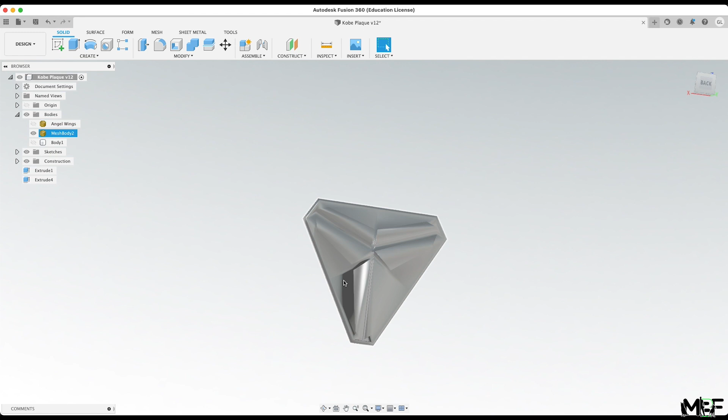Mamba out. So, my very own design, but not really, because I'm going to be stealing some other designs off of some online sites to make this happen. So, let's get started with the obligatory, tried and tested Black Mamba logo. This was an easy model to find with a really high level of detail, as you can see in some of the smooth indentations and transition points in this model.

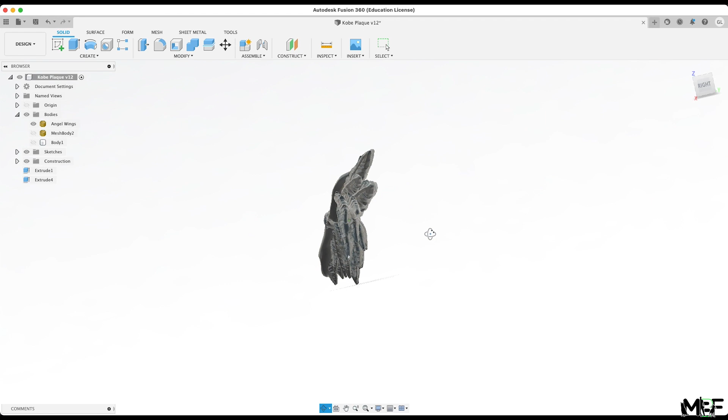Next, let's add some wings. Not as easy to find. I had to suffice with this model here, which wasn't the exact style of wings I was looking for, but the detail was high enough for me to carve out with the CNC. You'll see later that this is also the cause of the most trouble for me. I wasn't sure how I wanted to combine the two of these yet, but I thought it would be cool to have the wings coming out of the logo, and so we'll go with that for now.

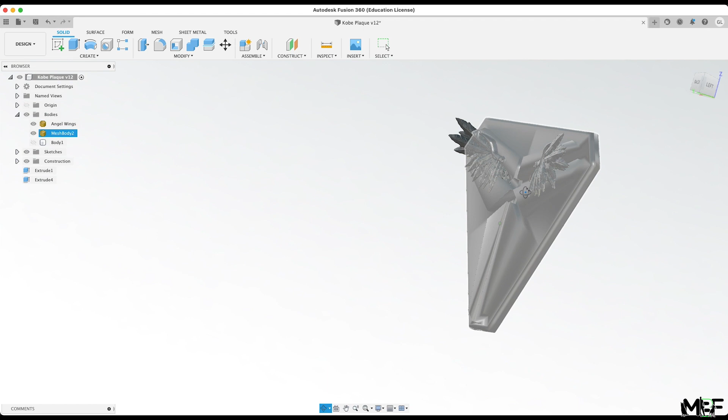The important thing to keep track of here is the depth, because there's only a certain stock thickness of wood that I'll have to work with, and I don't want to go overboard with the layers here. And now, the easiest layer, adding an NBA jersey to the top layer by extruding out an SVG file of a generic jersey design.

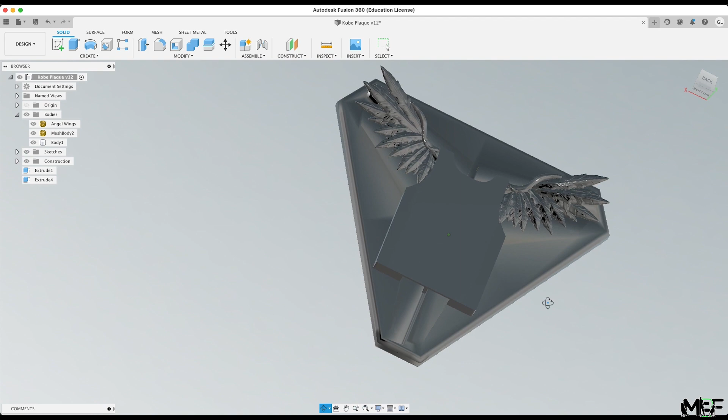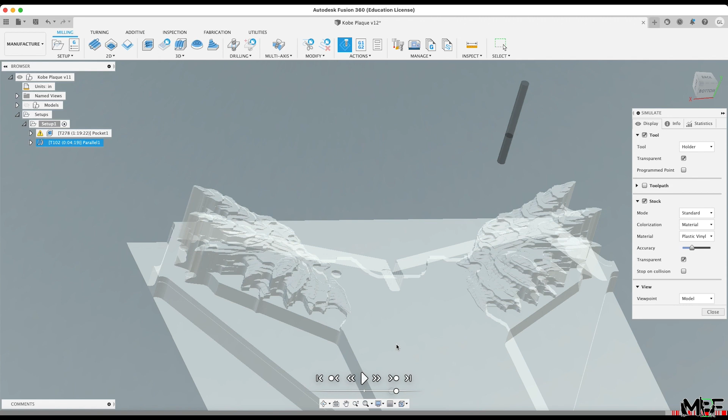Okay, now let's tell my machine how I want all of this cut out. I'm going to keep it simple, a pocket operation that lets me clear out a massive amount of the wood to get started with a 1/4 inch bit, followed by a parallel operation with a tighter diameter to get as much detail as possible in this design. The smaller the bit, the better this will come out. And again, we'll touch on this later. Okay, let's export this out and take it to the Shapeoko CNC machine.

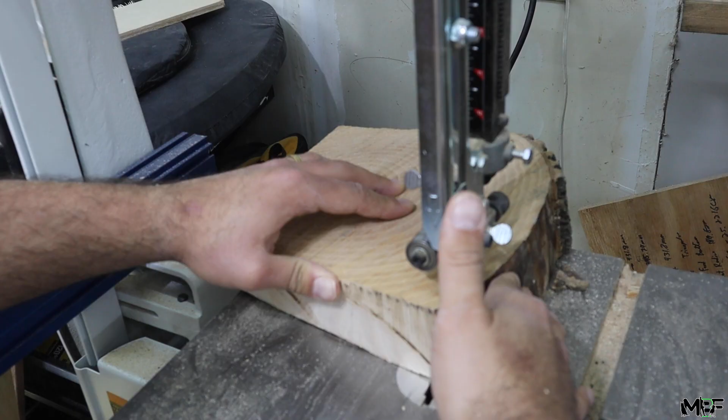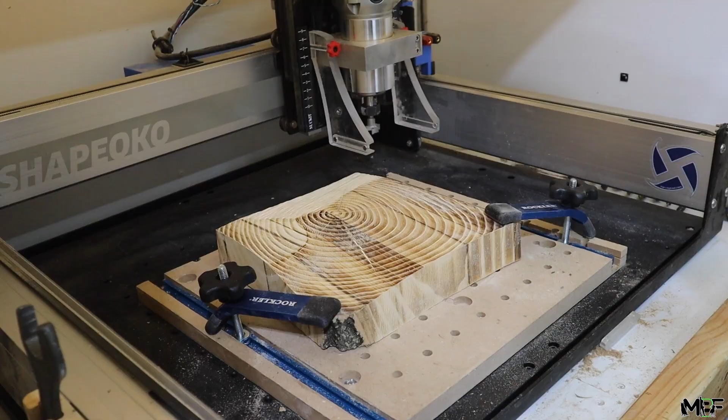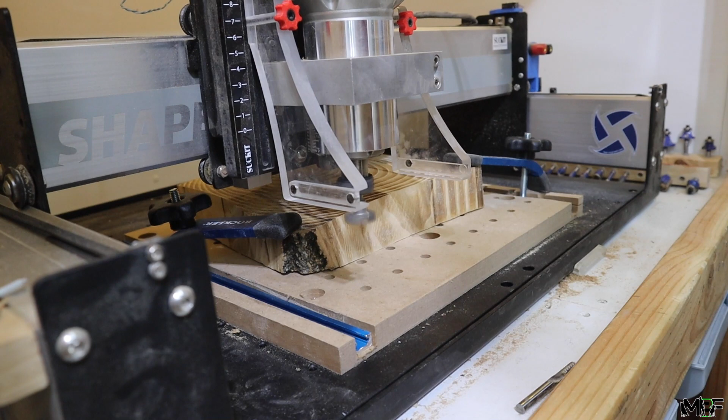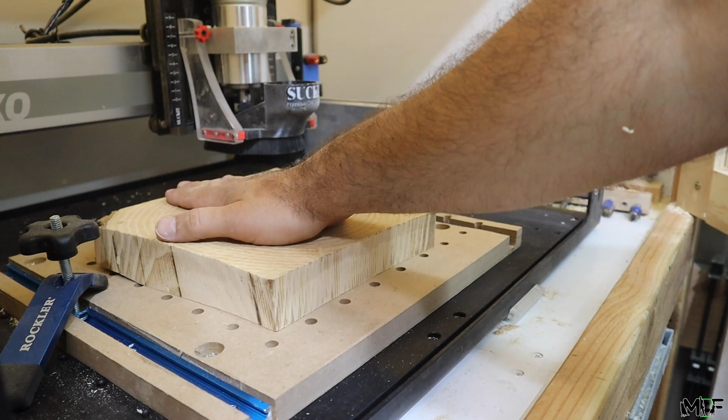I also flattened it a bit on the bandsaw, but I'm going to flatten it properly when we get to the CNC. We're going for 1.5 inches of depth here, so I'm going to be using a wider carbide bit for flattening on top. Then we're going to use this flat side as the bottom, that way we make sure we're even when cutting down from the model. Some double-sided tape, a nice pat on the top, and some clamps on the edges, and this thing won't be moving anywhere.

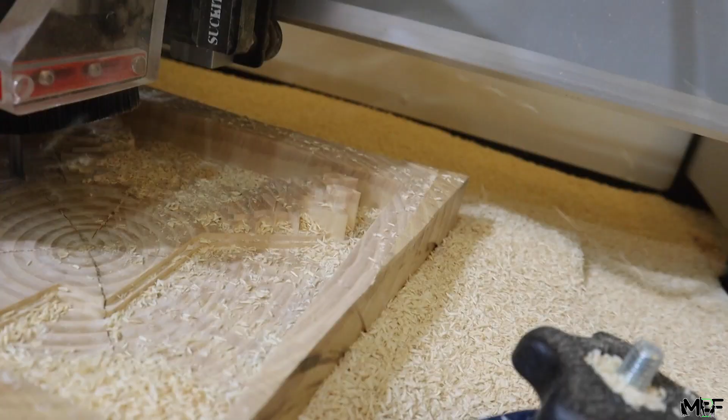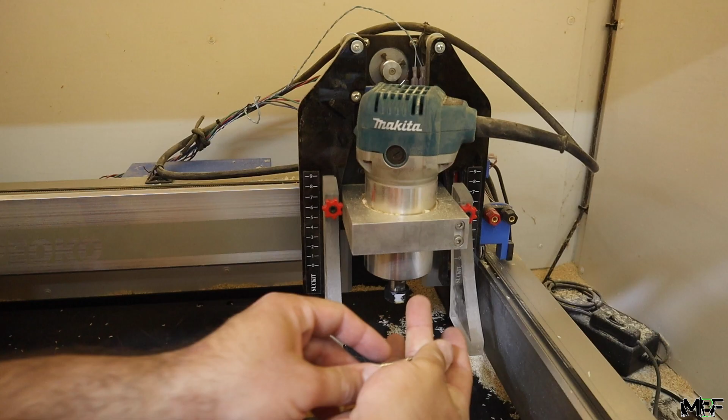Now, let's switch from the flattening bit to my 1/4 inch bit, and there's my elbow. Sorry about that. Now we're seeing that operation where we're taking out a big chunk of the wood at a time with a 1/4 inch bit. And remember that part I said about the smallest bits being able to give the best detail? Well, don't let those be from China, or else you're going to notice the same thing I did at this moment: the bit doesn't fit inside the CNC collet.

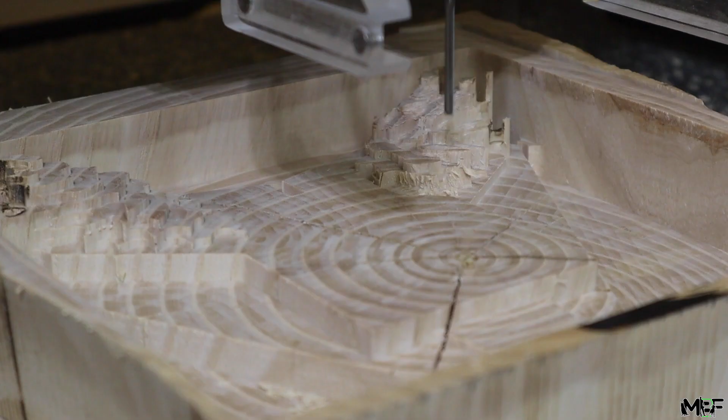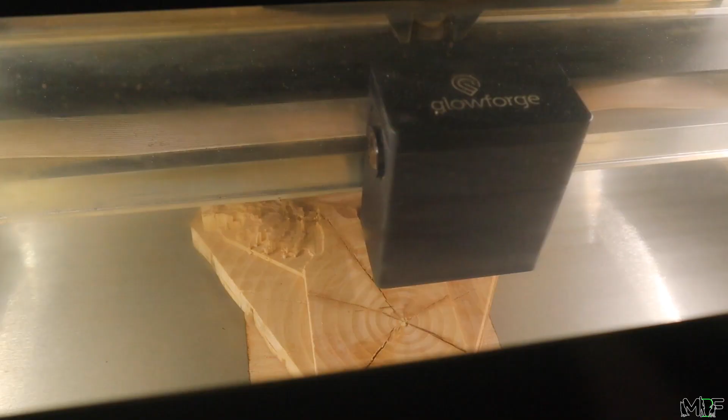Well, that's completely wasted. New plan, let's use this extremely long 1/8 inch bit, which has way too much wiggle, and is way bigger than is needed for the amount of detail. So yeah, we're going to have to make a take 2 on this design after my new bits arrive in the mail that let me get much cleaner detail, but this will do for the first prototype. So let's go ahead and finish it up. We're going to add some finishing spray, and as a final touch, I'm going to laser on Kobe Bryant and his numbers on the back.

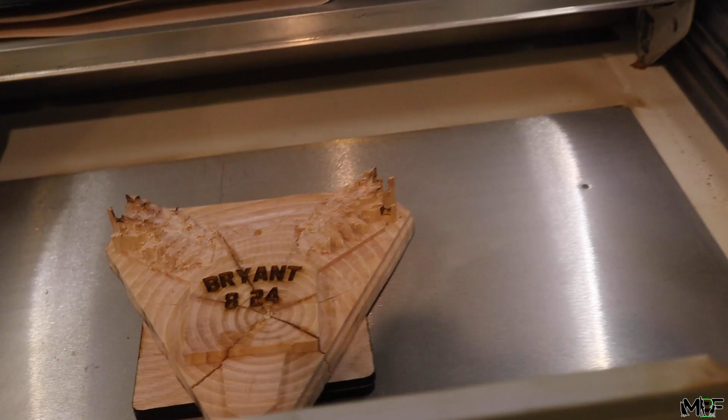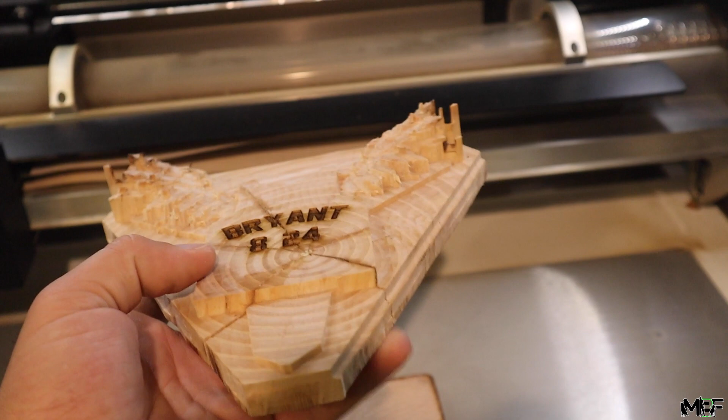Even though this one had a lot of issues, the wrong choice of wood, failed bits from China, I'm still pretty happy with the concept of the design, and there's things I want to improve on in the next one, but I'm happy I was able to make a tribute to Kobe during his week in the Hall of Fame. So, until the next one, Mamba out.

What a magnificent one. Kobe Bryant, a standing ovation at Madison Square Garden from some of the most educated observers of the game.